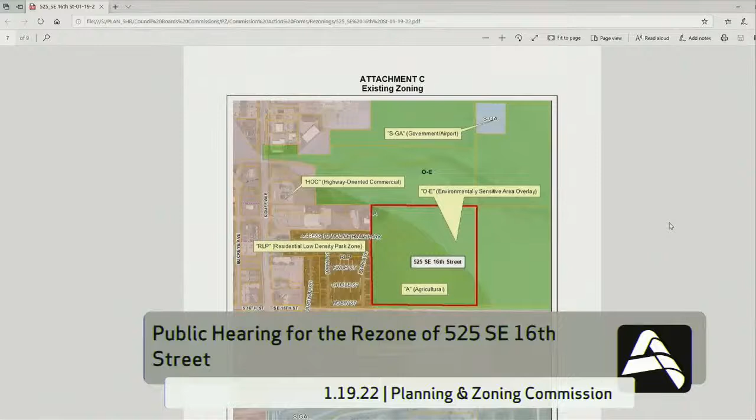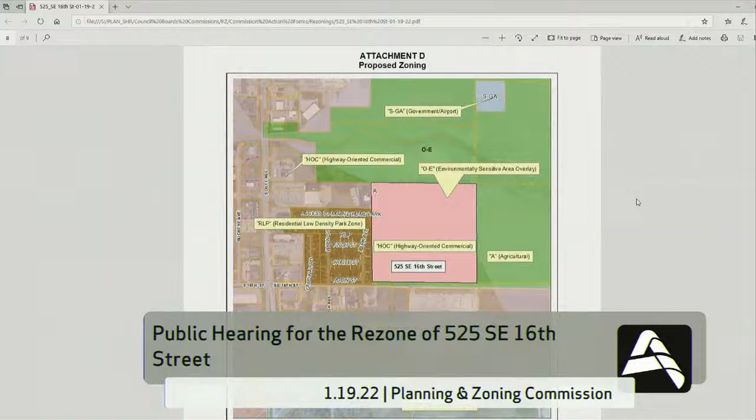That's it? That's it. HOC would not allow a trailer park. That is not allowed in that zone. It's a commercial zoning district. Mobile home parks are only allowed in the RLP, a residential land use designation.

So Kelly, what type of landscape buffer is usually required, since the trailer court is to the west there? It says HOC has a 20-foot yard requirement on a residential boundary with a commercial zone.

So is this like an opaque landscape buffer? The planning materials call it a high screen, a combination of 6-foot mature landscaping with some trees. The alternative is to include a fence along with landscaping in that area. It kind of depends on site layout, whether the fence is better or the landscaping, and how the building and parking lots get situated. But that's the base expectation in HOC.

So there's the 20 feet, and then they'd have to do the buffer on the other side of the 20 feet, or could they do it within that 20 feet? It's a building setback of 20 feet, and then they could do the high screen requirement on the property line. Normally HOC doesn't have 20-foot setbacks, but it would be required because it's adjacent to the residential.

When you're working with whoever the applicant is, I'm assuming you guys will be sensitive to things like the parking area headlight glare. That's what the high screen is intended to address, or ameliorate to some degree. That's the purpose of that standard.

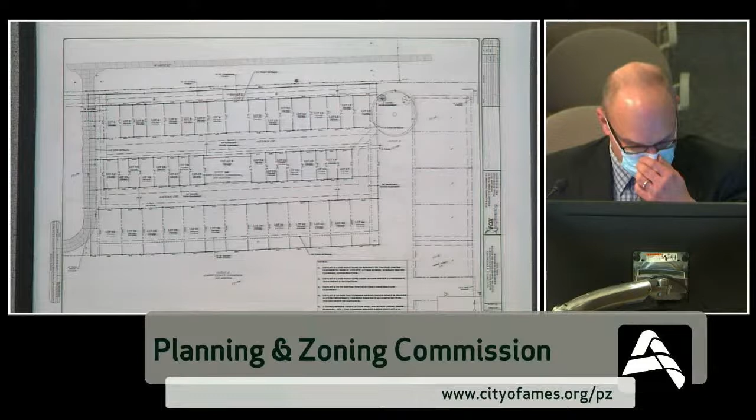So we have a rezoning request before you tonight that involves applying a planned unit development, PUD, overlay designation along with a major site development plan and a preliminary plat. The property owner is 574 Investments LLC, and what they're proposing is a 44 lot subdivision designed as a planned unit development. The current zoning designation for this property is FSRM, floating suburban residential medium, which is the base zone designation. That base zone designation will stay on this property, and so when we say we're doing a rezoning, we're really not changing the base zone designation.

We're just applying the planned unit development designation to the property as an overlay. Along with that comes the plat and the major site development plan, specifically all as part of the plan. In this particular case, the major site plan will control the development in terms of structures and use. There's a preliminary plat now that you're looking at, which will eventually lead to a final plat that establishes the property lines. The planned unit development, the PUD, is all of that, and is the design of the proposed development.

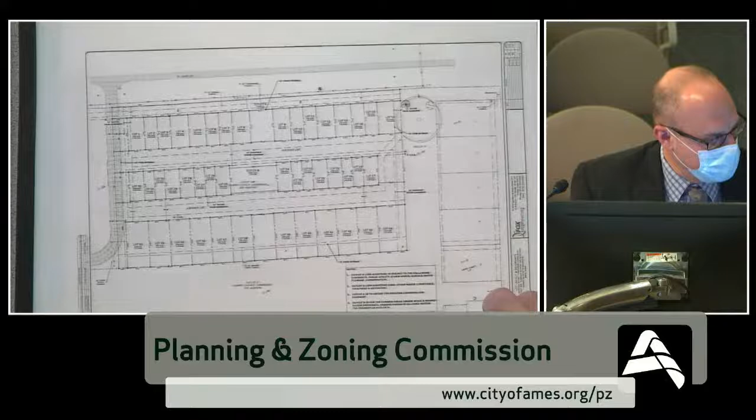The proposal is 44 lots, which includes 44 units of housing. The proposal is a mixture of townhomes and what we refer to as duplex homes in the report, really a bi-attached type of home on their own lot, arranged along 190th Street. 190th is up here to the north, and the Vintage Cooperative complex is to the west. This is in the Quarry Estates subdivision on the north side of the city.

This is a conservation subdivision. Up here you have open space dedicated as conservation area, and some outlot area that comes through the middle of the site that's been left open, separating the clusters of townhomes and duplexes a bit. That follows the form of the conservation subdivision, which encourages clustering of housing.

The PUD involves townhome lots approximately 1,400 to 3,600 square feet in size, and the bi-attached duplex building lots are about 4,500 to 6,100 square feet, depending. The base zone of FSRM still controls for height, use type, and perimeter setbacks, all of which meet base zone regulations here. There are interior setbacks that do differ, particularly the front and rear setbacks of these homes, which I'll get into. That's part of the deviations that can be accomplished through a PUD.

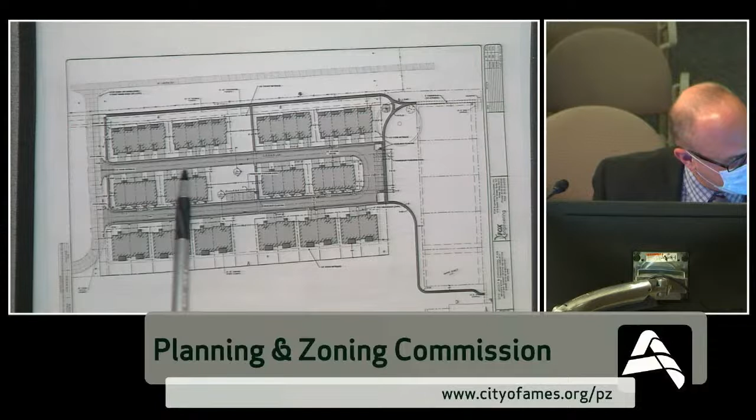You've got 190th Street to the north, which is a rural section of road with ditch. Then you've got the middle row of townhomes, which have their garages facing north, and the front of those homes facing the south leg of the loop here, the private street to the south. So what you've got is this already functions partially as an alleyway to begin with. So the developer is asking that that garage design be permitted to exist as they've proposed it.

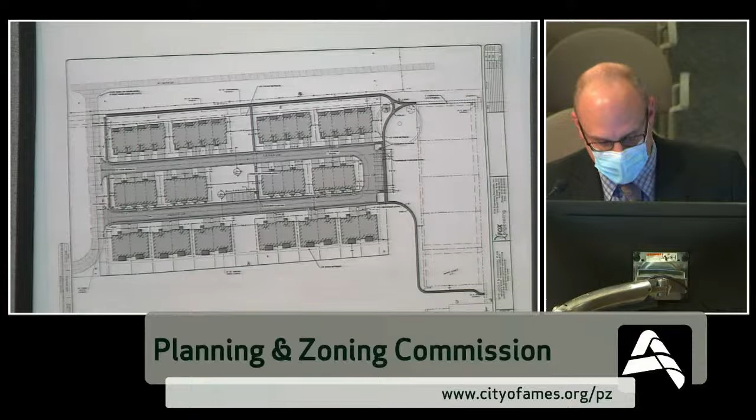I'll put some elevations up here in just a moment for everybody to see. Along the lines of those deviations, we do have in the addendum a table that runs through some of the basic deviations. What you'll notice is that we have lot widths that in this case are proposed to be slightly smaller than the standard minimum lot width under the base zoning. You also have allowances requested for through lots with the design. Some of the lot sizes are smaller than the base zone standards would also permit. And then your setbacks, the internal setbacks, your rear and front interior, as the townhomes face each other, is reduced from what typical setback would be otherwise under the FSRM standards. And then also your street width is reduced from a local public street, which is a 26-foot requirement, to a 22-foot requirement.

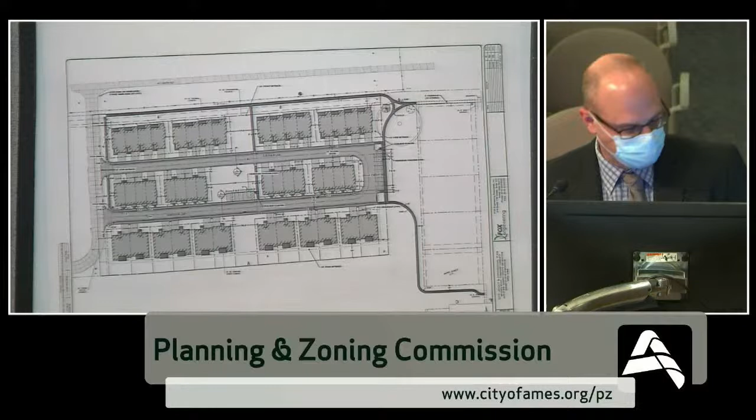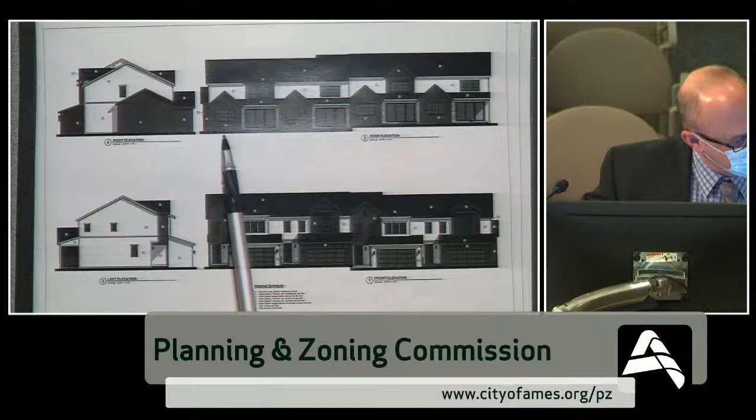I will go ahead and put up real quick so everyone can see a look at some of the elevations. This would be the north row of townhomes that's proposed. So you see here, these are the garages talked about in the report that will face the south. And then this is the view that you would see from the north on 190th.

This now is the middle row of townhomes. These garages here will face north. This is more oriented to be a rear with rear access, and the garages are kind of flush with each other there. And then this would be the front orientation to the south, along the south leg of the loop street.

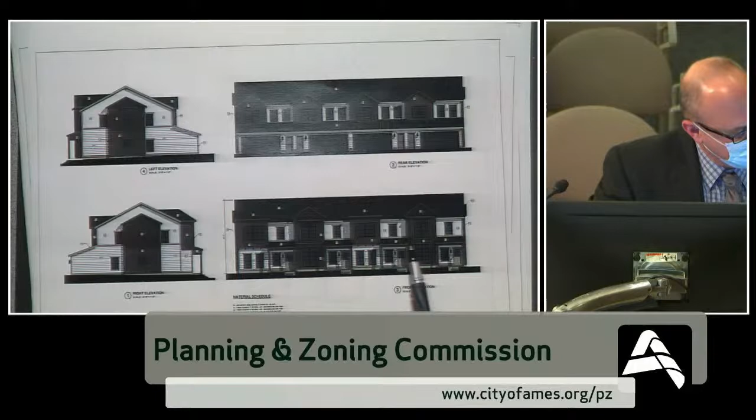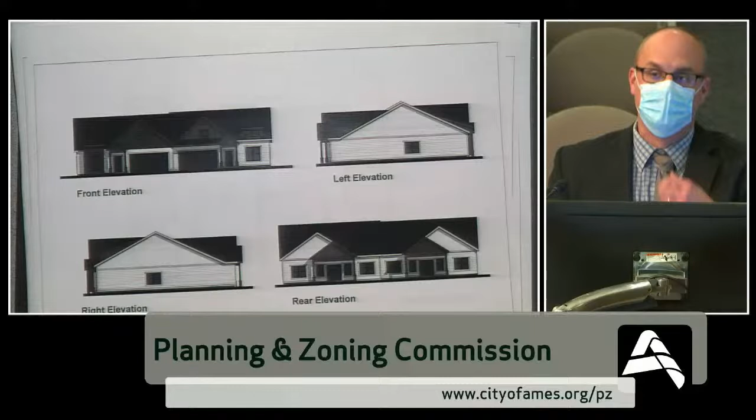And then you have the bi-attached, the duplex style homes there, which you'll see to the south, the front elevation with the entryways. There's covered porches, and then the rear elevation there as well.

So we list, of course, the land use goals in there as well. And we also list the findings in one of the attachments, as well as the supplemental development standards for the PUD. And with that, I can answer any questions that you might have at this time.

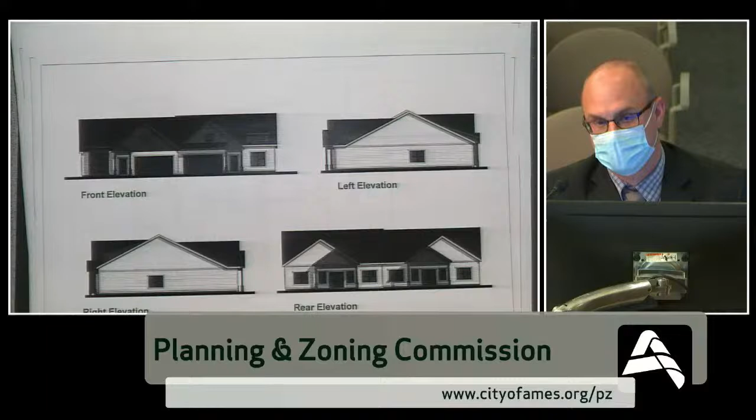So Justin, I'm just curious, do we have a definition of what a front facade means? Like a general definition? Well, there's a series of things - the front lot line is where you access the property or are addressed. And then the facade that faces the front property line is typically your front facade. So it's a series of definitions based on where the front of the lot is.

So I think the question of what that alley is, is still open, especially because it's a PUD. It's not technically a through lot because there's that conservation outlot out to the street, but they definitely don't have the ability to have access to that street either, regardless. So that's kind of where we got to - if you call it the front for one, it affects the other, just the way the layout of these particular three styles of homes are. There's clearly other ways homes could be situated to avoid it, but in this arrangement with three different homes, some front loaded and some rear loaded, it brings up this question that's put here in front of you with this PUD. So depending on the outcome of this discussion, alternative 1 or alternative 2, we'll know how to proceed forward.